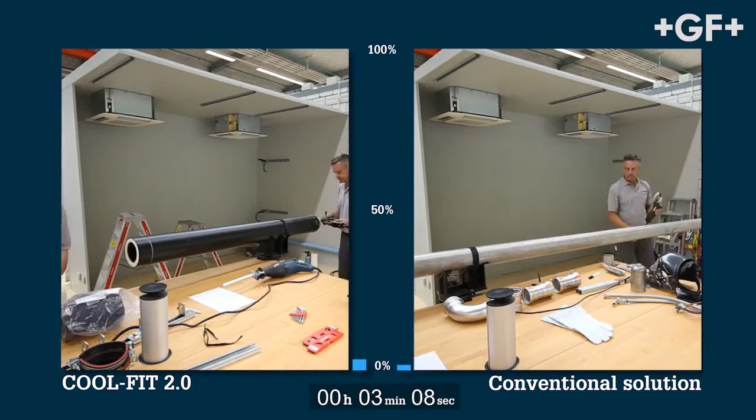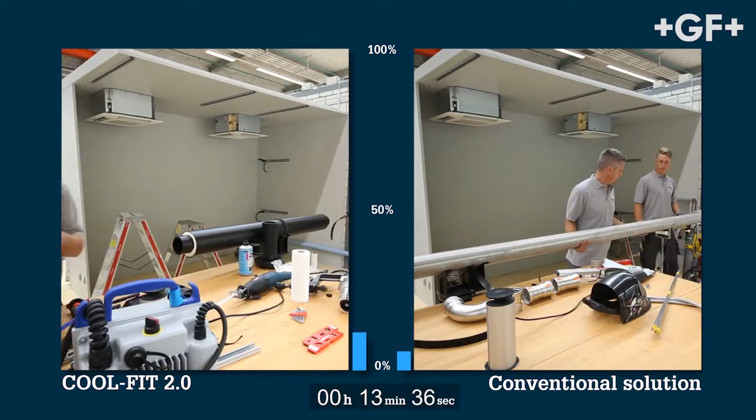Both sequences show the installation of two directly comparable cooling circuits. On the right, you see a conventional stainless steel system which will be post-insulated. On the left, a pre-insulated CoolFit 2.0 system.

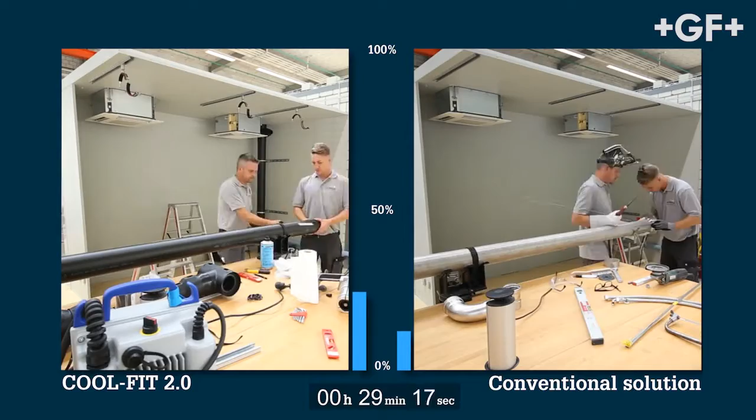On the left, the CoolFit pipe is having the insulation removed using the GF foam removal tool, and the internal pressure pipe outer surface is being prepared for electrofusion welding, while on the right, the riser pipe is being prepared for welding.

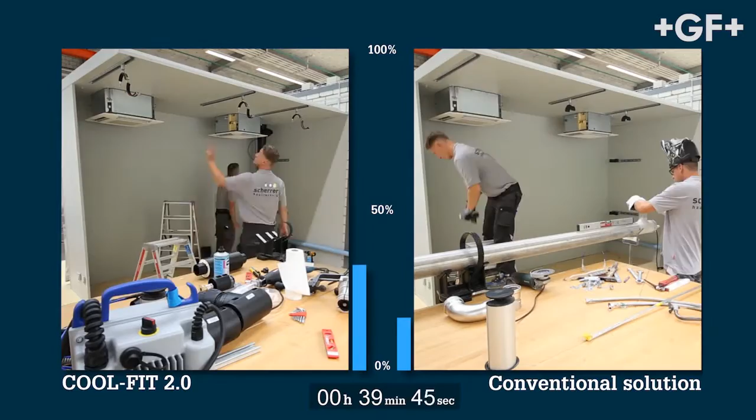The CoolFit 2.0 riser is ready for installation. The T-fitting and flange connection are already mounted and will later be welded in the assembled position. On the right, in the conventional installation, the flange adapter is welded onto the pipe.

In the CoolFit 2.0 installation, the horizontal distribution pipeline is already being installed. Insert, clamp, and start. CoolFit 2.0 electrowelding is so easy. The welding of a DN50 fitting takes only 72 seconds.

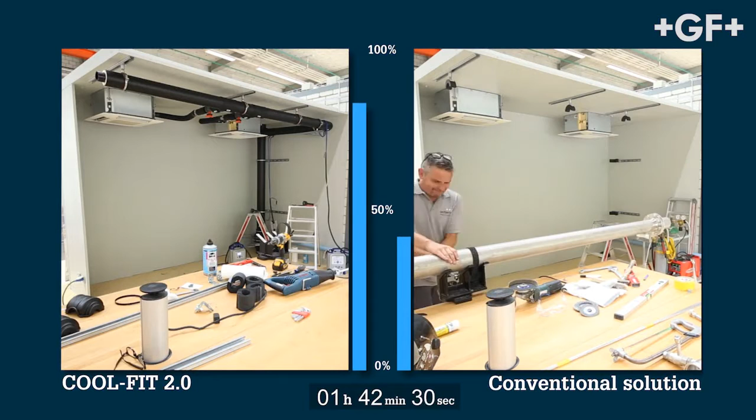It even leaves the CoolFit team time to take a coffee break. While the final assembly steps are in progress on the left, the horizontal distribution lines are still being crimped in the conventional system.

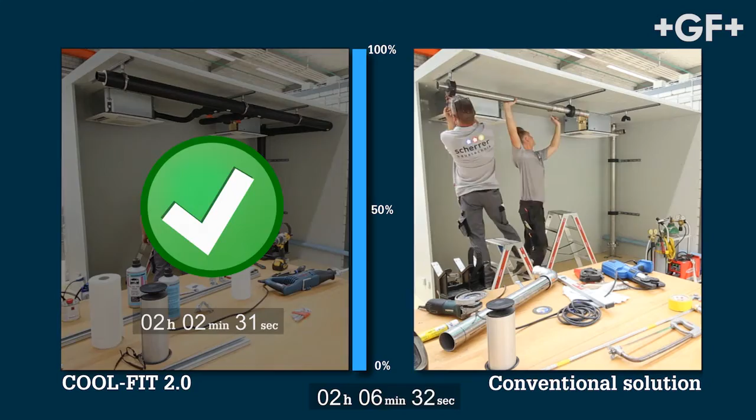The media pipe, insulation, and outer jacket are combined as one product. Assembly takes just a few quick steps. The CoolFit 2.0 installation is completed. The usual post-insulation process is just starting now.

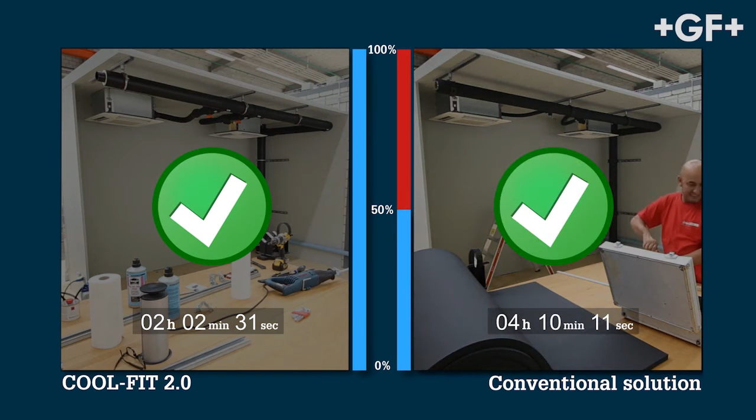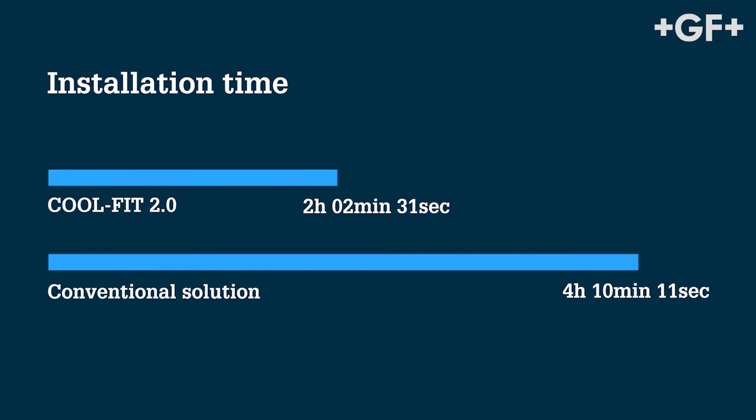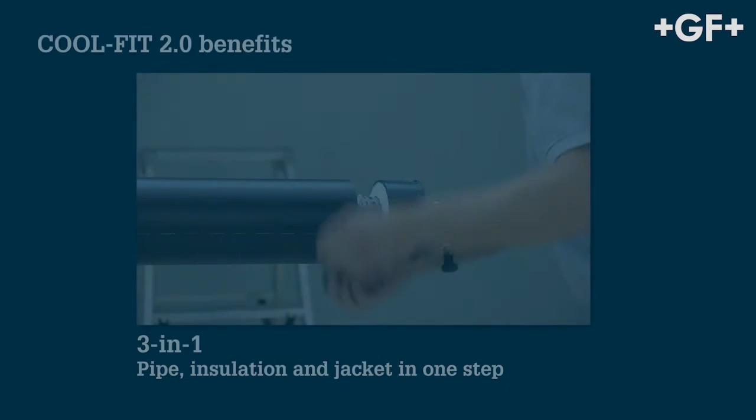The installation of a CoolFit 2.0 system saves 50% installation time compared to conventional systems. That's thanks to its clever 3-in-1 construction consisting of the pipe, insulation, and the outer jacket.

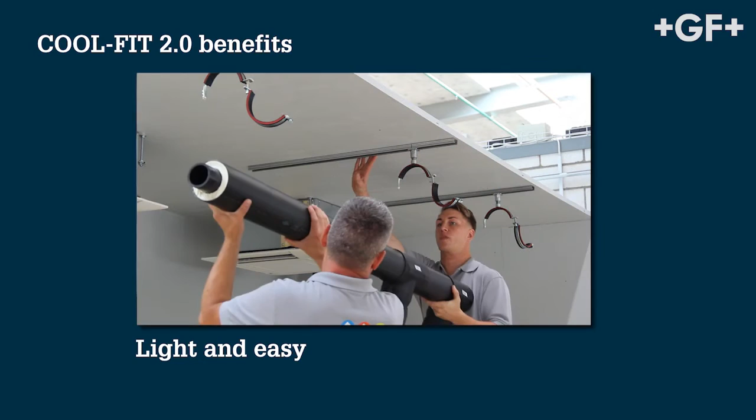Machine-controlled electrofusion allows simultaneous operation, which saves additional installation time. The ultra-lightweight, fully plastic system makes for easy handling. COOL-FIT 2.0, the revolution for efficient cooling.